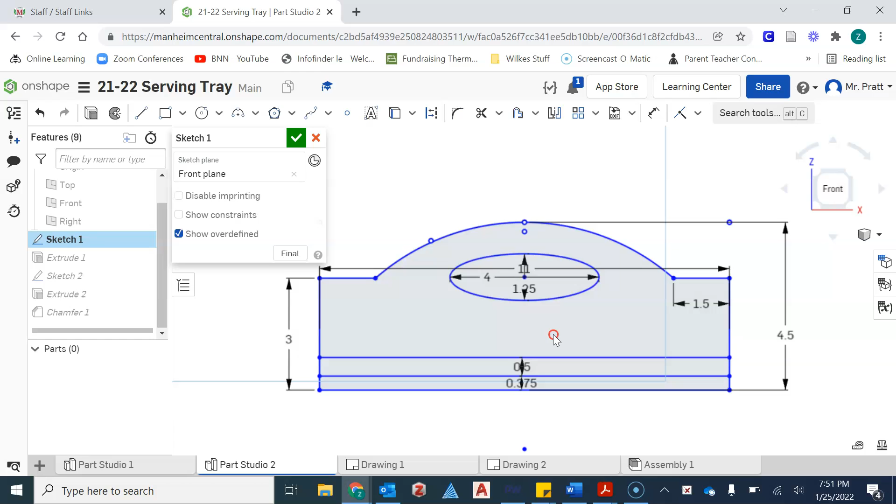One thing missing on my drawing is this outside box at the top. A simple way to get that box is by offsetting and extending lines, and I want to show you how to do that.

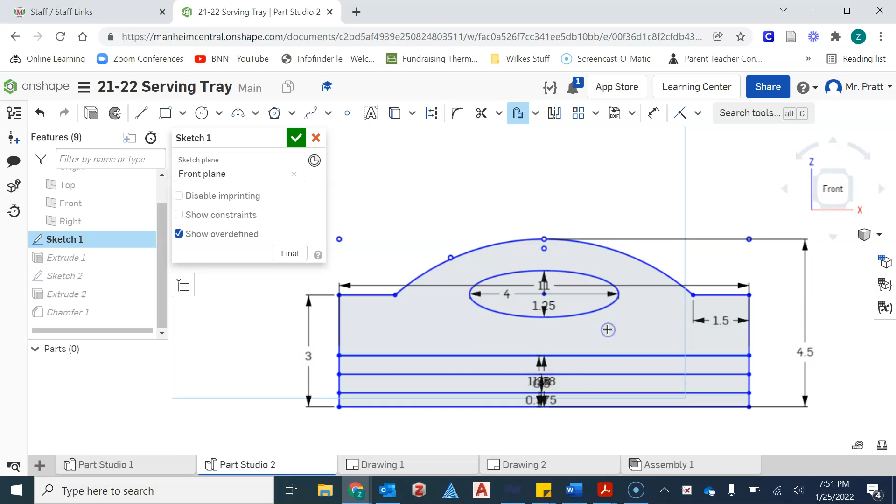Again, the offset tool is that thumbs up icon. We're going to click on the bottom line, and I'm going to move that arrow so it's pointing the right direction. Type in 4.5. That's going to show me a line at the very top, which would identify the top of my handle there.

Now I can go ahead and, using the extend tool, extend this line to that corner. And the same thing would apply here.

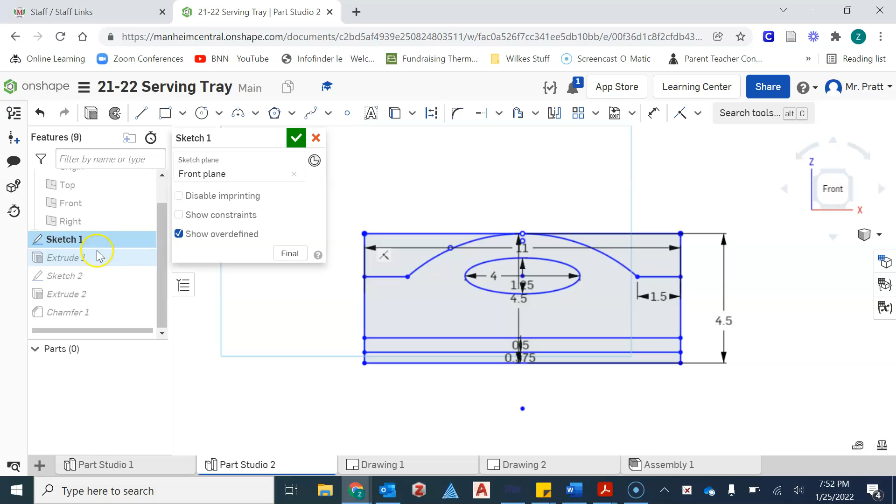So this is what you're going to be taking into Partworks. Now that I have that done, I'm going to unclick my extend tool. We're going to create a DXF file necessary for us to be able to bring this into Partworks.

To do so, you're going to right click on Sketch 1, check mark this, right click on Sketch 1 again, and export as a DXF.

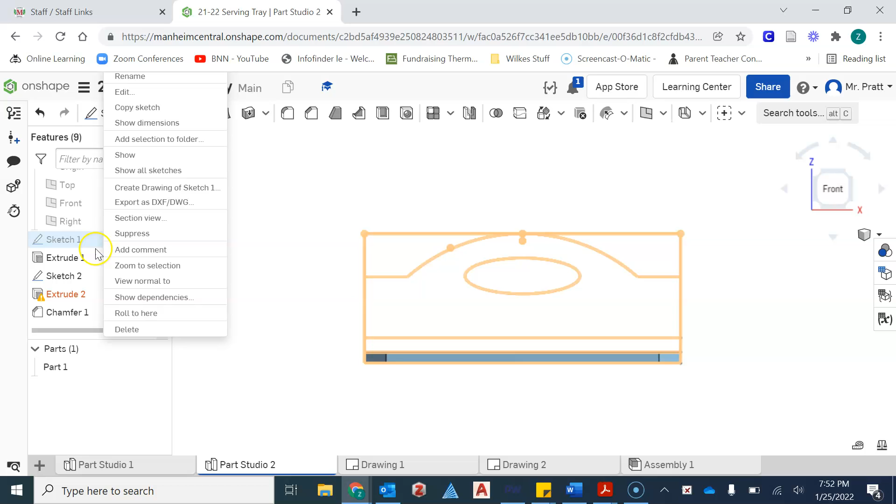Now I have a bunch of other things over here in the window, and that's just extrusions. So we're going to export as a DXF drawing. I'm going to make sure that my file name is something I'm going to remember.

I usually like to have my last name involved in that, as well as what the part is. In this case, it's our serving tray handles. It should be a DXF, and it's okay for it to be release 14.

We're going to go ahead and make sure that we're downloading this. This is something that will have to be done on my laptops here in class, so that way we can bring this right up into Partworks. We're going to hit export, and this is going to show up in our downloads folder.

So now that I have that done, I'm going to go ahead and move into Partworks. Now what I've already done is create a new file and started the job setup. The job setup is going to be the same size as your rough dimensions in your parts list. So for our handle, it's 13 by 5.5.

We also want to make sure that our thickness is correct, which is 7/8, and that our Z0 is at the top of our board. And finally, our XY origin, or our home, 0,0, should be the bottom left corner as you learned in Mat 1. We're going to hit OK.

And now we can go ahead and bring our file in. A lot of students make the mistake of hitting File, Open, and opening up the drawing from there. However, to bring in a vector or DXF file, you need to import vectors from a file.

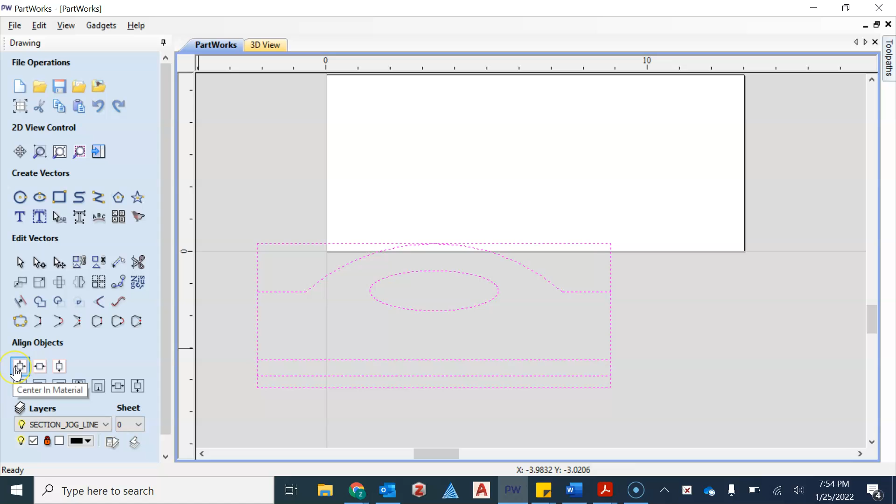And now that I have this centered in the material, I can see I have plenty of space to put screws in my board to fasten this down.

In the next video, you're going to learn how to create your toolpaths and save your file to the flash drive.